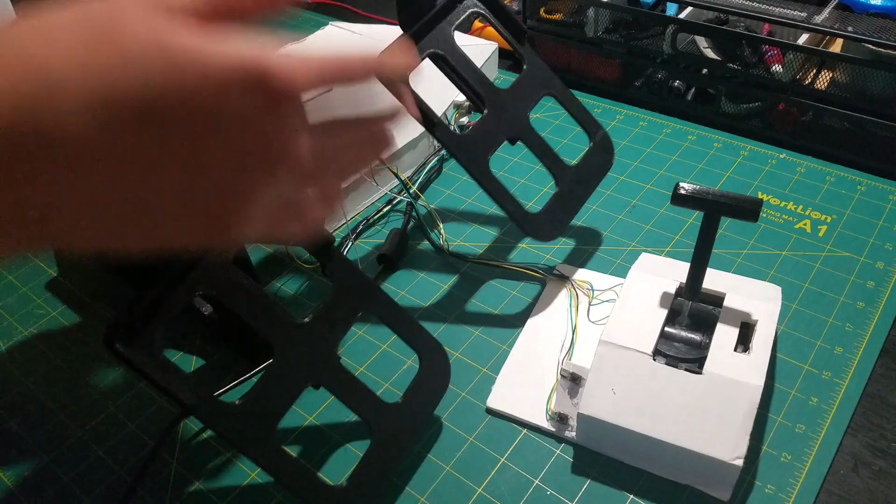Then the final part is just these rudder pedals right here, which as you can tell are fully 3D printed. You push down one and move this potentiometer right here, and that works like that. So these work well, I think I'll do another design of these in the future because they seem to be a little flimsy and I want to improve on that.

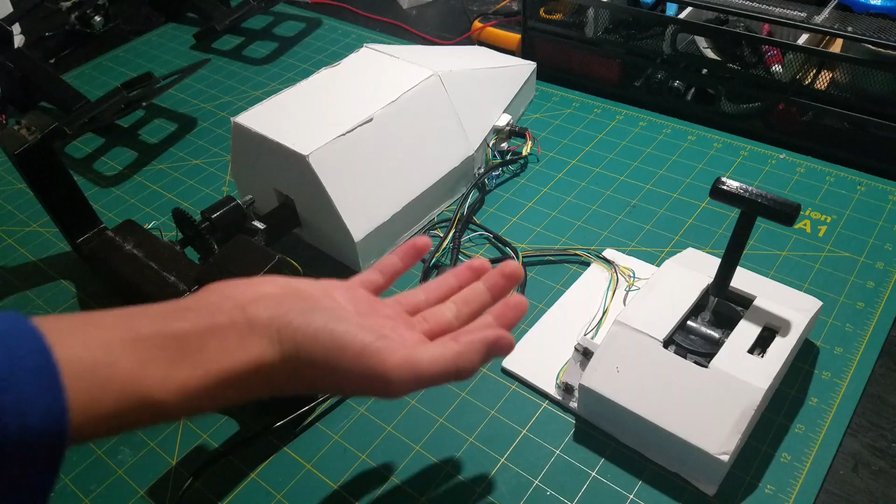So I did a live stream the other day. Unfortunately, in that live stream the audio was really low, so that was unfortunate. But I fly around a Cessna 152 in that video, or live stream.

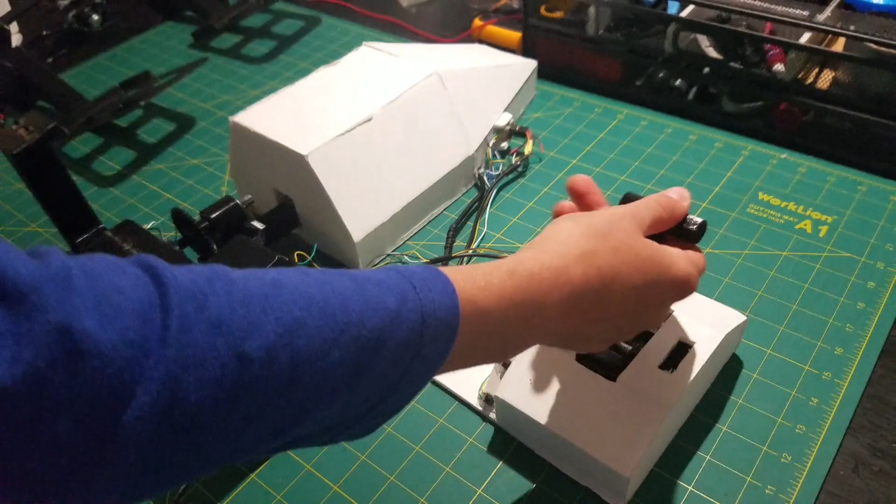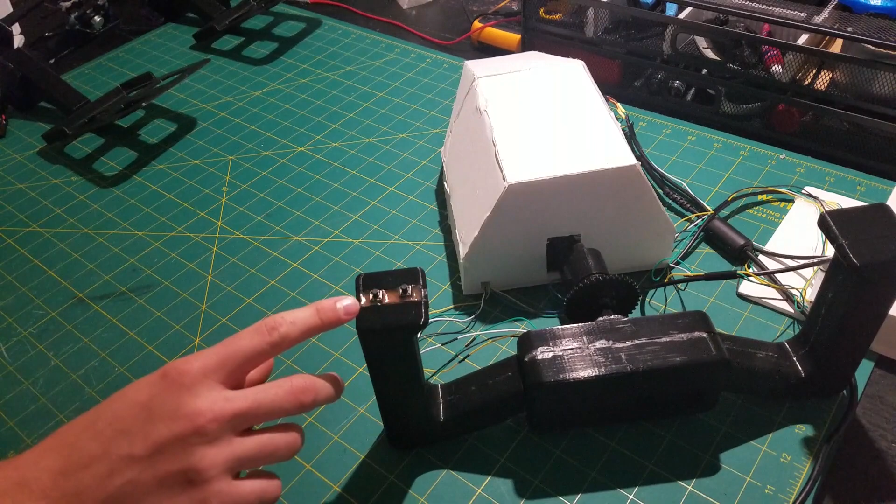The final piece is just the throttle, which just moves as you would expect it, and there's two buttons on the throttle. Another thing I didn't mention is there are two buttons on the yoke. I use this for light, brake, parking brake on the throttle, and landing gear. That's what I use that stuff for. I can add more buttons in the future, I just haven't really needed them.

The one thing that makes this a little difficult to build is I used an RC remote control thing from an RC flight simulator board in this. I can't really show it to you because of the box. I think you could also use an Arduino, I want to experiment with that in the future, but currently I don't have it working with an Arduino. So if you build this yourself, you'd need to know Arduino programming, and if it can work with potentiometers. Otherwise you'd probably need to get a flight sim remote control for an RC simulator and use that, but that's just one drawback.

I've been using this for a couple months now, about a month now, and it's been working great. So now I'll just probably show some footage of me flying, and get some shots of me using this. Just enjoy the rest of the video.

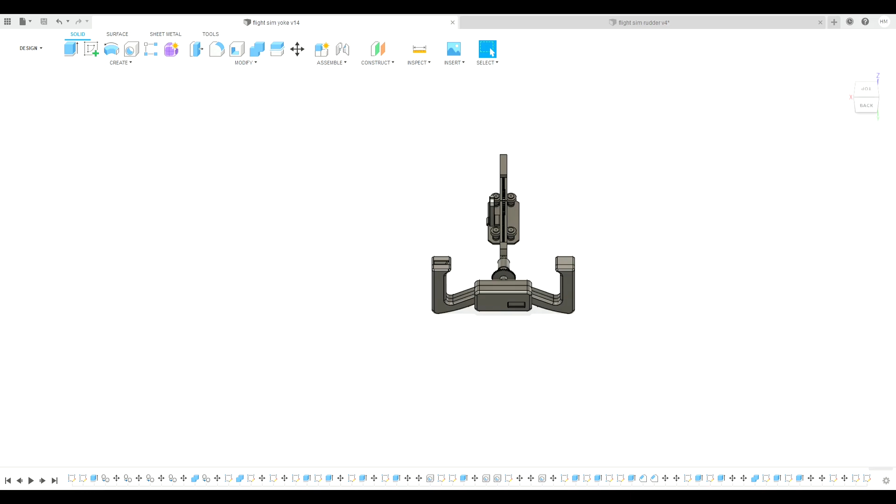Okay, so now that I've gone over what it actually looks like and how it works, I'm going to show you the CAD files. So this is the yoke, this is actually all that I have designed, the rest is just made of foam board. In the future I might actually 3D print the whole box and stuff, but currently this is what I have, just the mechanism.

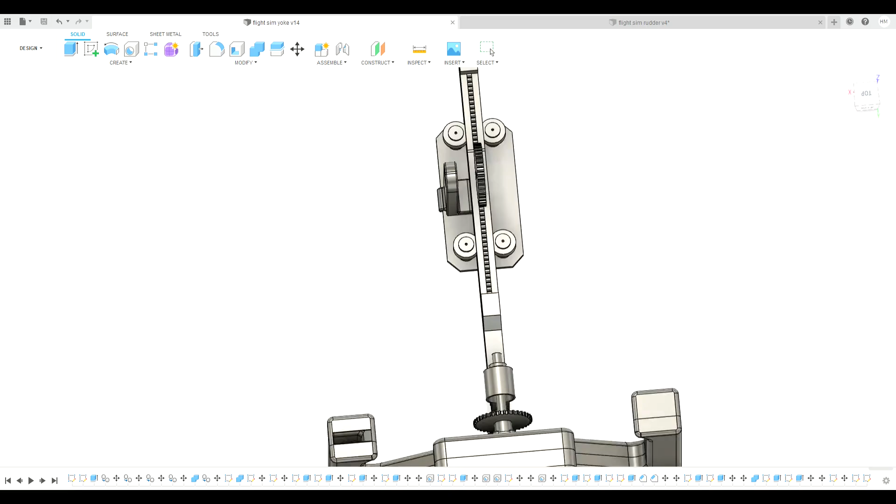This is the yoke piece itself, which is made up of 6 pieces, and they just get attached together. There's a cutout right here, basically between these two pieces, that is cut out to leave room for the two buttons.

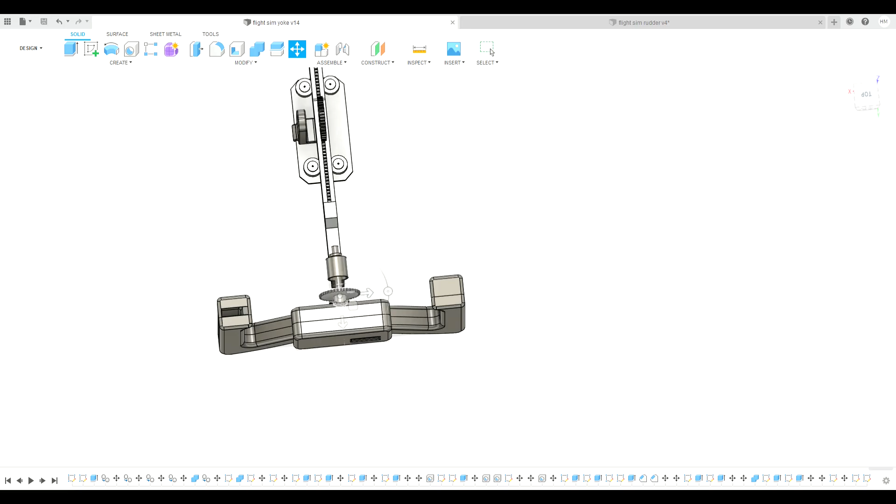Then next we have the gears right here that I use to get down to spin the right amount. Then it has two bearings there that spin this, and then the gears here. There's a potentiometer here, along with right there, that I use to move it and measure the signal. And then I send that to the control board, which sends it to the computer.

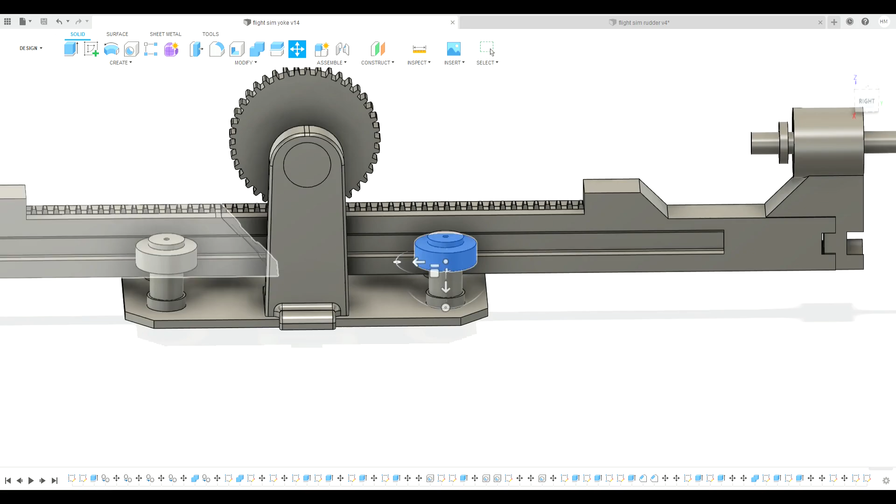These things right here are actually bearings, they're just the models I made of them, so those don't actually get printed, but everything else gets printed. And this just slides really well and turns nicely.

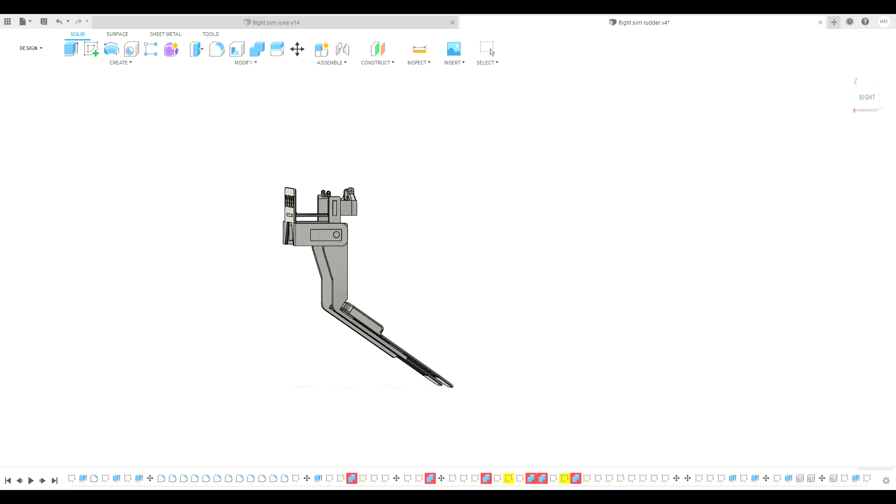So now moving on to the rudder pedals. For the rudder pedals, this is what I have, just these pieces that rotate on two bearings there. Then there's control rods that go between these two pieces, which gets set into a potentiometer that has a spring, so it automatically centers it. I might want to beef up this one at some point because it's a little flimsy, but normally it works pretty well.

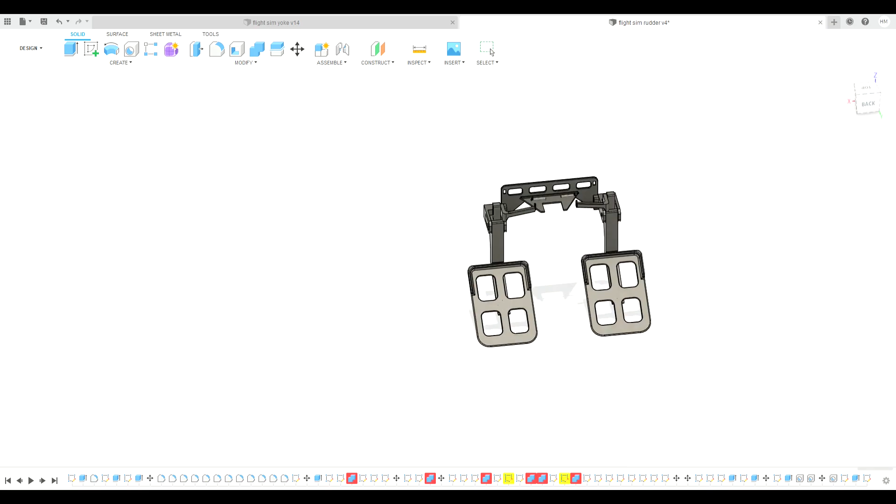So this is just the rudder pedal design, and now just moving on to flight footage and actual usage footage. Won't have any voiceover or anything, so this is the last time I'll be talking in this video. I hope you enjoyed this video, and that's all for this video.